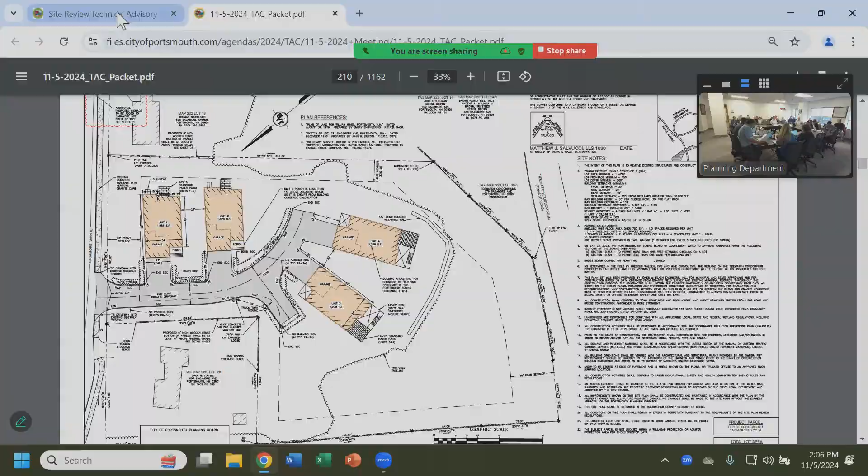If you have that, that would be great. I just have one copy of the previous iteration. But we extended the wall along the back side of Unit 4 and then the back of Unit 3 at the suggestion of Dave, and added plantings along the top of that wall. So I think it was just something that Eric wanted you folks to look at, make sure that it met your approval before we moved on.

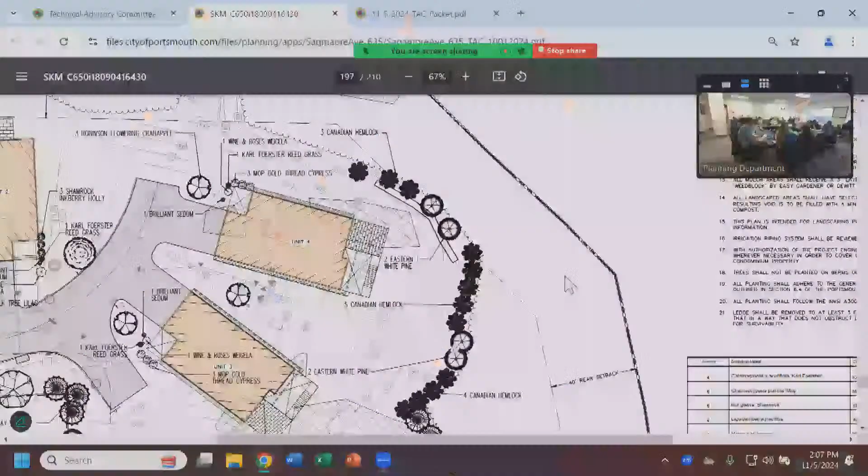All right, this is last month's. Yep, so that's just that one section, and then if you look at this month's plan, that's not the landscaping plan, but it does show the wall, and then the landscaping plan will show that L2 sheet, I believe, will show that plantings along the top of that wall. So I think that works to address the concern.

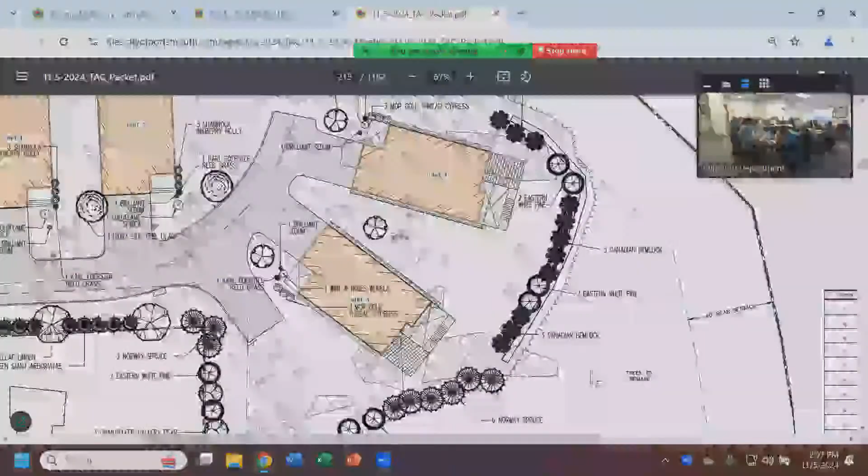And then the only other concern, I think, that was brought up by both staff and by Eric were these sand absorption areas. Joe Coronati couldn't be here today, but walked me through what those areas are intended for and the maintenance of them. They're primarily, and we can add some additional notes that may satisfy DPW if that's where the concern came from, but it's really just...

...monthly and perhaps more seasonally to have the landscaping company that would be hired to maintain the grounds, take a look for trapped leaves and things of that nature that might block the flow of the water. The O&M manual does suggest that if there's any ponding discovered, the association would contact a professional engineer to evaluate the situation and provide remedies if the blockage wasn't obvious. So we think we've addressed all the concerns of the committee and of Mr. Weinreb, and happy to answer any questions.

All right, any questions? So, the sand — you're expecting the people in a 4-unit condominium development to monthly inspect their stormwater system?

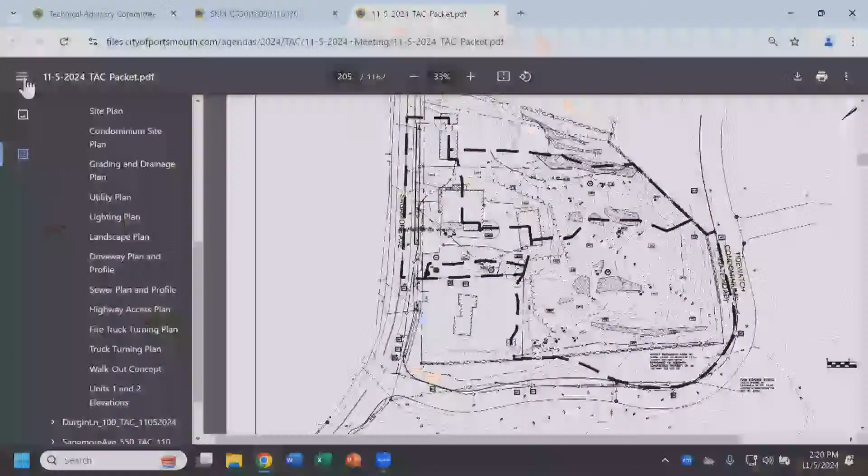Somebody's got to explain it to us, since we're the abutter, what a sub-catchment area or boundary is, because it's on the Tidewatch property. What it implies to me is that we can't catch all the water on the property currently, and it's got to be a good neighbor that takes it on who is already in water distress. We are already in water distress.

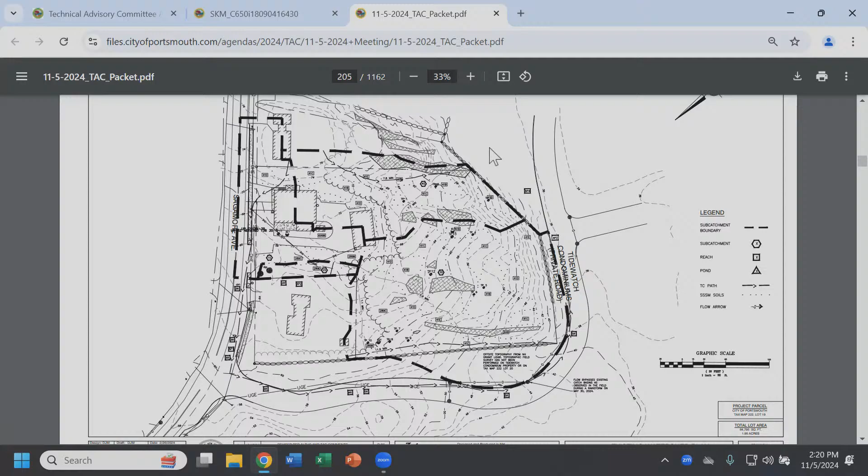W2, please. Is that one W2? Yes. Thank you very much. That retaining pond, does it have a setback requirement? And then while we're on that one, I'll try not to repeat myself, but there's also, you can't see it as well on this one, an overflow or riprap sort of overflow piece just to the bottom right of that. You can see it a lot better in another picture. That looks to me like it's on the property line. Does that have a setback requirement?

Can you go to DM1, please?

I think it's just a couple down from where you are. Very good. If you look at that tree line, that doesn't look like it moved to me.

And that still seems excessive, because TAC brought up the fact that removing those trees and anything that's catching any of that water would clearly create a problem downstream, as they say, and guess who's downstream? That would be Tidewatch.

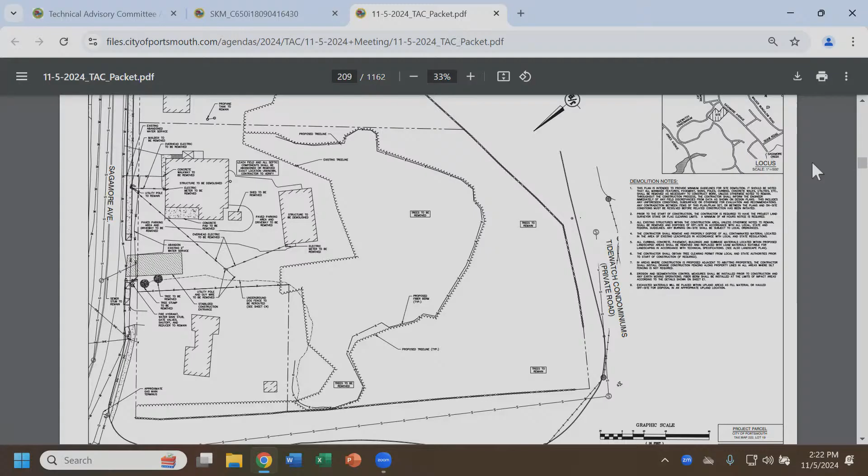C2, please. That boulder wall now, my eyes are not that good, but I think it's up to about 145 feet long. And you can see the Tidewatch Road behind that. I'd be hard-pressed to understand that you can't see that in the woods or whatever trees are left there, etcetera. I submitted to planning some pictures that would give you that indication. But that boulder wall, I haven't seen a boulder wall that's really that attractive.

My guess is it's going to be used from stuff that's blasted from that hill. And that boulder wall is going to clearly be in sight, which again, I think is incongruent with what ZBA stated as one of their approval statements.

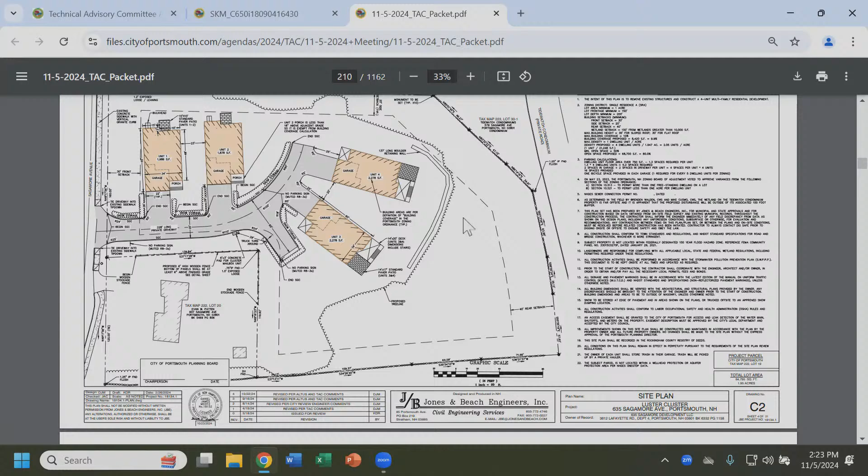All right, for TAC, you can go, you don't have to do it now, but you can go to C3, and you'll see that that riprap outlet is right on the property line. Again, it indicates to me that we can't manage the stormwater on the property, which I think is a requirement of the regulations for the planning committee.

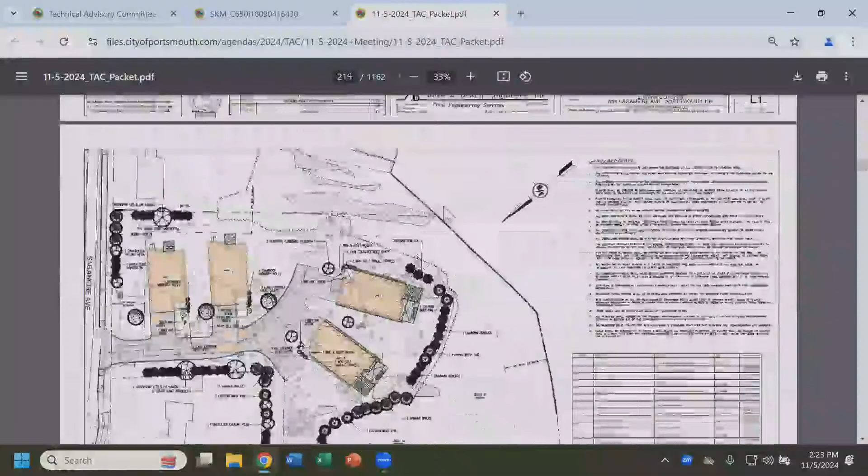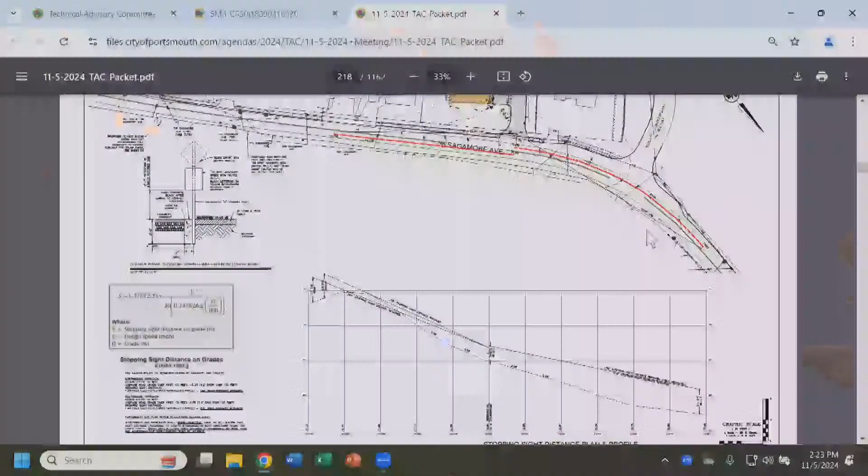H1. H1 is back to this line of sight issue. It's my understanding, and I look for TAC to please confirm this if I'm wrong, and actually, not if I'm wrong, I'd like for TAC to confirm this. It's my understanding that the adequate and regulated line of sight requirement is not met, and that we are potentially going to give a waiver, if you will, for the requirement for line of sight. That to me seems irresponsible, and it seems dangerous.

Just a quick anecdote. Yesterday, driving back to our place on Sagamore Road, just before the Sagamore Court Apartments, somebody was taking a left. Line of sight is calculated from the middle of that access road, from the cluster, again, Luster cluster as they call it, it's the middle of that access road. That person was stopped easily 10 to 15 feet short of that mark, because it's just a natural left-hand turn you're going to take. You're not going to be in the middle of the road and try and take a left-hand turn. So our calculation for line of sight, while it might be regulatory, it's not an effective and practical line of sight. It's a dangerous position we are putting people in. There is no doubt in my mind on that one.

The maintenance of the system already showed - I had that as a note, but I'm not going to bring it up because all of you just brought it up.

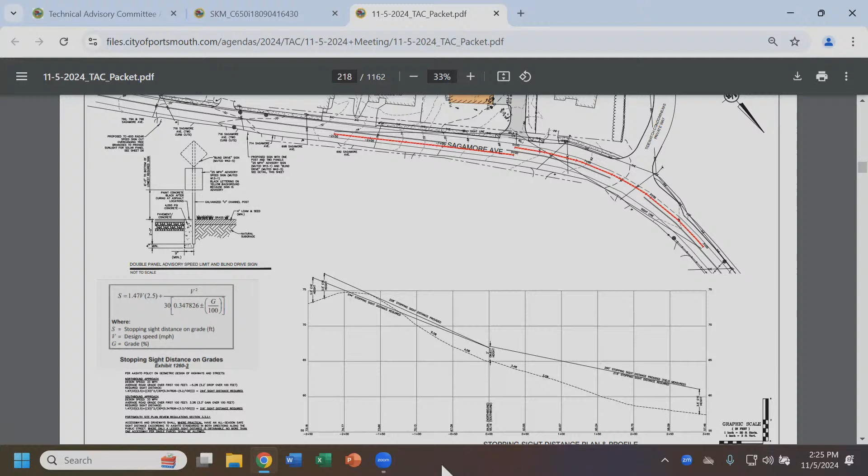Let's see, just a couple other items, sorry. So in the response regarding the elevation of the granite, I don't know exactly what it was, but in items 7 and 8 in the document, it spoke about the elevation of the basement versus, whatever you'd call it, the slant of the hill. I'm curious, did the basement move up or did the hill come down? Because they answered it in a way that just, it didn't seem like anything moved in the answer.

So I'm just, again, above my pay grade, but it's still there. Overcrowding of a granite lot with 4 units will logically cause dangerous conditions for motorists, residents, and pedestrians. I do not suggest that I have even a clear appreciation of how hard it is for TAC and for planning and everybody else to deal with all the requests and objections that applications and rejections that people come to you with.

But I did take the time to go to the site plan review regulations for the city. And if you look at that criteria underneath 2.9, evaluation criteria, there's 19 of them, I think it's 19. And there's several that I just don't believe are met.

Number 3, adequate erosion control and stormwater management practices and other mitigative measures, if needed, to prevent adverse effects on downstream water quality and flooding of the property or that of another. Even with all of the engineering, I just don't see it.

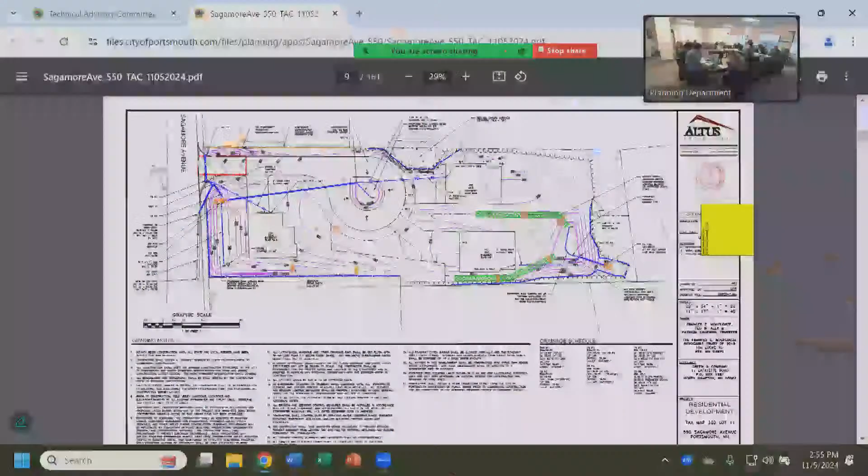We were before you on October 1st for TAC, and we came back following that meeting and made some minor revisions to the site design. In summary, we relocated the rear stormwater management area. If you go to C3, we moved it 20 feet toward Sagamore so that we have a 35-foot vegetated buffer to the property line, with the exception of the outlet pipe.

We raised the finished floor of each building and determined the basement elevations of each building so that we could demonstrate and provide gravity perimeter drains for each of the 3 units. The house on Lot 3, the front lot, we slid back and reconfigured slightly, which allowed us to raise grade a little bit by moving it back, since the roadway grade is a little higher there. We made that a gravity perimeter drain into the closed drainage system near the driveway or the roadway.

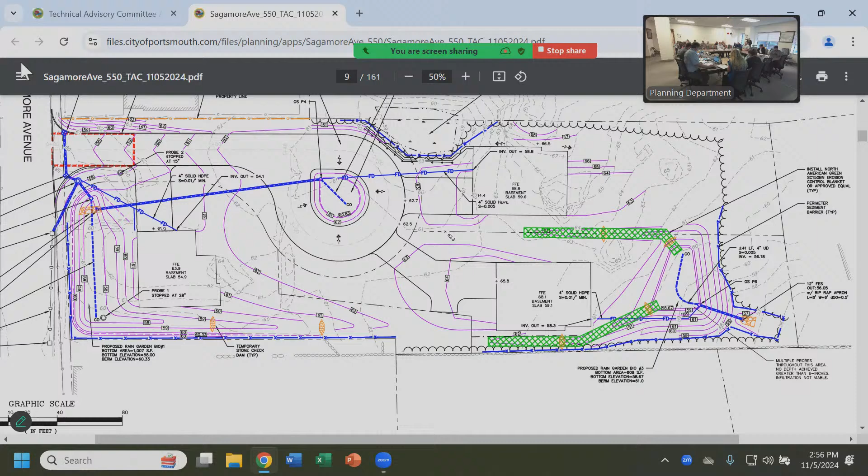On the subdivision plan, which goes up a couple sheets, we added the utility and grading easement onto the plan, so you have in that crosshatch area the utility easement areas in addition to the subdivision.

Lot 4, which is the private right-of-way, is actually now identified as Lot 4. We initially had come in as a 3-lot subdivision with a private roadway, and it didn't click with me that it was actually a 4-lot subdivision.

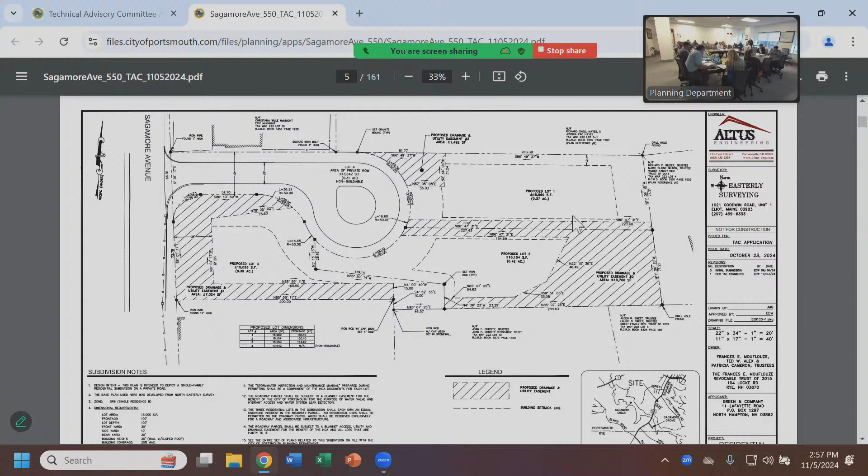On the landscape plan, we've added plantings at the bottom of the retaining wall, around the isolated wetland, and done some additional buffer plantings on the site. Also in the package is a representative building plan and elevation, and those are the revisions we've made as part of the submission package.

I have comments - I believe there were 5 comments in Stephanie's email from the other day. Is there an agreement for the maintenance of the right-of-way?

That will be part of the homeowners association documents. It will be part of the legal review as we get to that final stage. We would hope that it would be a condition of both TAC and planning board.

Please demonstrate compliance with the site plan regulations for section 623 - a whole bunch of items. So the landscape architect has made some minor changes to the plan. They have a letter issued to us yesterday, and I don't want to hand it out because I know that's not what you guys want to see, but there are just minor changes and clarifications to make sure we are fully compliant with the landscape requirements.

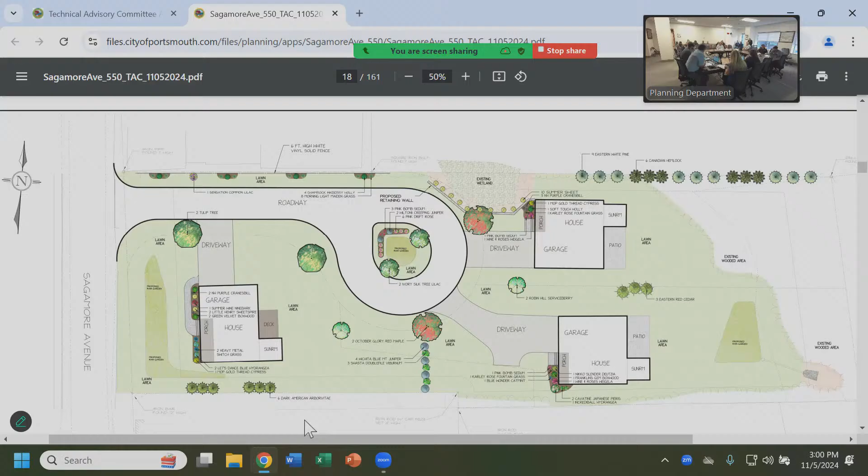So that's really it. I believe the comments and concerns were quite minor, and if you have any questions of me, I'm happy to answer them. Thank you - any questions of TAC?

This plan shows that the stone wall is not disturbed along the property line. In places I believe it is, but... is it the stone wall directly adjacent to the house you're talking about? Let's go to the existing conditions sheet. That next sheet, yep, and that one is upside down. So that wall is further back, not up near the front. The stone wall is all on your property near the front until we get into the woodland, into the forest. So is that pin in the rock wall then? Yeah, but that's 200 feet away from Sagamore Avenue. We're just talking about the actual lot line, because my lot line runs all the way back along that stone. We're not touching anything on the lot line, we're not touching the wall.

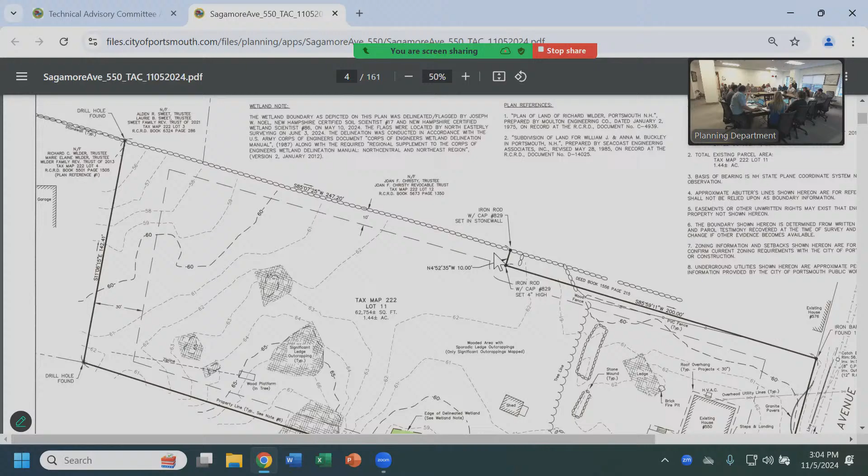Are you aware of where those pine trees are? If you'd like to make comments, we just need you on the microphone, and we really can't have a discussion. No, that's fine, you guys can have a discussion after. You know, I'll ask him after. Okay, that's fine, thanks.

If you will go to C5 on the drawings, I think that's the one I was looking at. Yeah, and so if you look at the lower right-hand part of the drawing, I think that's the area of concern. That's where I think there has been some engineering or planning taking place. I believe that's called a rain garden that's being proposed there, which will help accumulated water. And then it looks like it drains off to some sort of area that has riprap in it. I don't quite understand technically exactly what it drains into.

I don't know if it's a dry well or something, but I think my next-door neighbors and I are very concerned that in the case of an extensive rainstorm like we had back here in January, that's just not going to be adequate to handle the water flow. And that water flow is going to come downstream because that's how water works. Water and gravity together produce a perfect storm, as they say.

And so I do not at this time feel that I have enough actual information to say that these plans are technically adequate to show us that we are going to have no large increase in our stormwater. And I would like to know if there's some sort of mitigation plan beyond what has been shown on that drawing that goes forward to help me understand this.

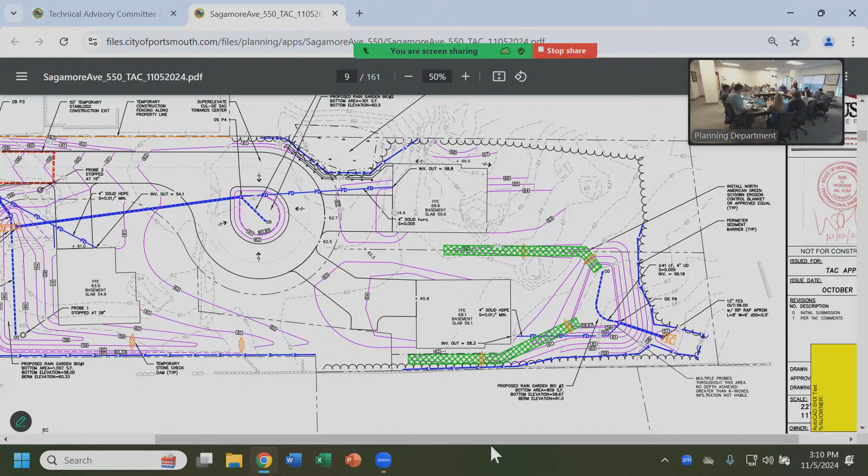I do feel that the Technical Advisory Committee, the TAC, as you call it, excuse me, needs to take another look at this and make sure that the abutters, including Alden, my next-door neighbor, and Rick, my other neighbor, who abut on the other sides, are protected from what could possibly happen. Thank you for your time.

Any other public comment at this time?

My name is Alden Sweet. I live at 72 Walker-Bungalow Road next to Dick. My main concern about this is exactly what Dick and Rick Hayes and a lot of other people have commented about: it's all ledge on the back of that property.

We're downhill from that. And I also have a thumb drive that I was hoping to be able to have you guys view of the water runoff right now. There's a natural sinkhole on the property that abuts mine on Sagamore Avenue. And just in a normal rainstorm, the water collects in that sinkhole because it's all ledge, nowhere for it to go, and especially in the winter when it's frozen, the ground's frozen. And the water runs down my property, onto Sagamore, down the street, and onto Dick's property.

And those two storms we had last January, it was probably 12 feet wide at the narrowest. Once it gets out into the street, it was halfway across Walker-Bungalow. Coupled with the fact that it's all ledge on the back half of that property, they're talking about clearing the trees, which is only going to make the water migration worse, not better.

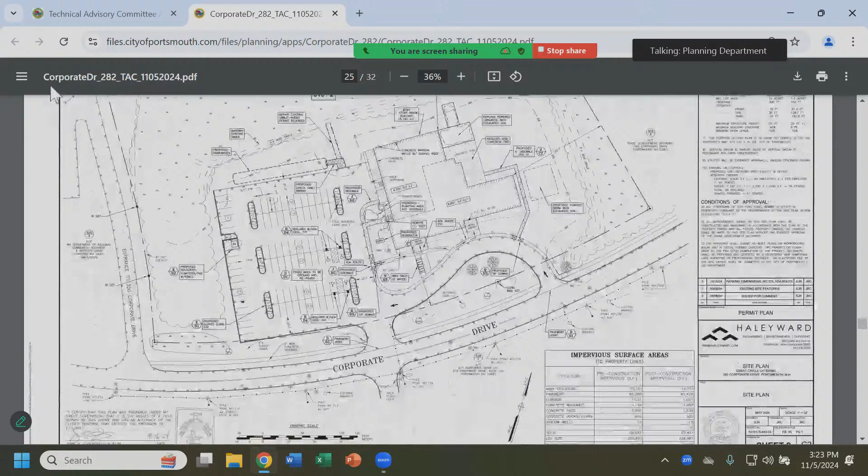Part of the project is to go into that existing swale and clean out the additional siltation that has occurred. That will be shown on further plans. This involves work in the buffer, so there's an application to the Pease Development Authority for a conditional use permit for work in the buffer.

There are no big changes to utilities, although we'll be adding a generator to the site. Water and sewer will stay in the same locations and sizes, but we'll add a grease trap. The Officers Club did have a small grease trap - we're going to add a right-sized, currently sized grease interceptor to the new sewer connection for that catering use.

The dumpster is going to be upgraded. Currently there's a dumpster on a pad that's in the wetland buffer - we're going to take out the pad and put a new dumpster pad with corral on the west end of the parking lot, upgraded with a board fence instead of chain link.

There are also some other removals in the buffer. There's a concrete pad that comes off the north side of the building, and we're going to remove a large portion of that, some of which is in the 25-foot buffer. Then we're going to introduce a sidewalk on the east side of the building for pedestrian access to the rear, to provide secondary life safety access and egress.

The plan that shows the grading and drainage - the buffer impact plan - shows the new grades in the parking lot and the grading of the swale. This plan shows the impact areas: the green buffer area, and the purple, which is the reconstructed swale and the cleaning of the swale in the back.

That swale runs from the northwest side of the parking lot around, heading east along and parallel to the back of the parking lot and the building, then turns and goes southeast and ends up at a culvert under Corporate Drive.

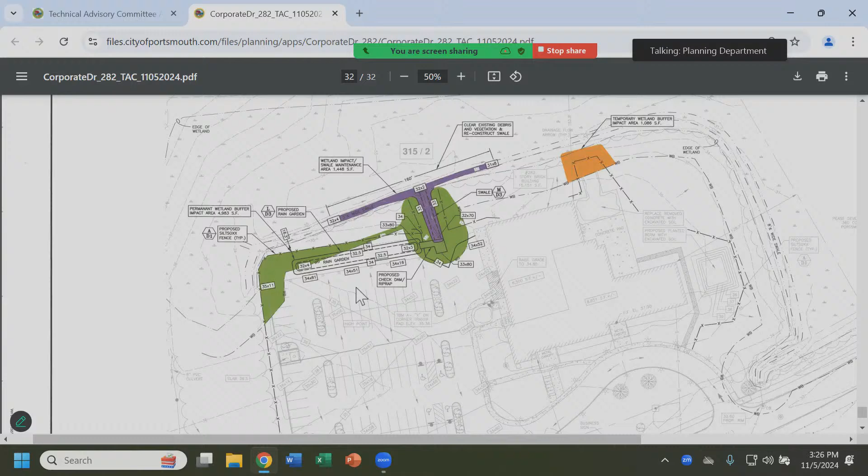The project received a couple of comments from members, and I did submit a response online. The first comment was that the parking lot aprons were recently reconstructed to match the new roadway grades, and if the aprons are disturbed as currently indicated on the plans, they are to be reinstalled largely as they currently exist.

I'm imagining that relates to the two tip downs at the west entrance drive. That's the area where we're showing some regrading. We took into account the new grades. There's a new catch basin that just got constructed to the east of that entrance drive, and I used that proposed construction catch basin grade.

I put a note on the plan about the recently constructed parking lot aprons, as mentioned in the memo, and noted that I put that on this revised plan, so the applicant is willing to have that as a condition. When we get into construction, if there needs to be an adjustment, we'll adjust either the driveway grade or reconstruct the tip down to keep it ADA compliant.

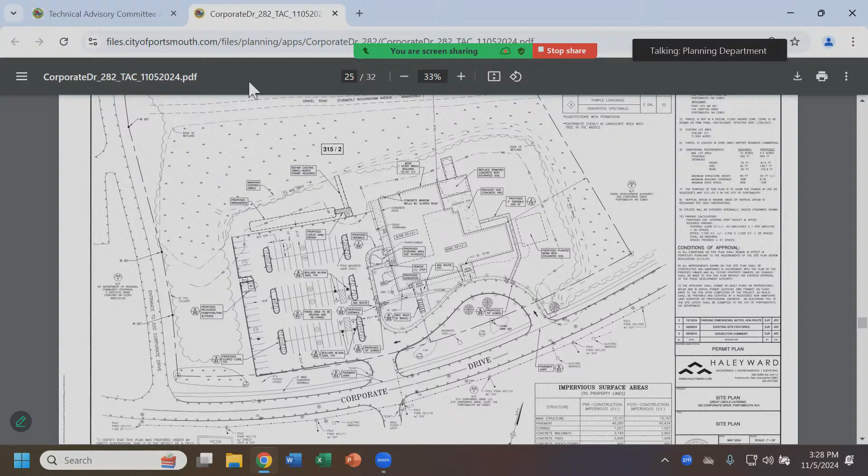We can also go check the grade. I believe that's getting close to being installed, if it hasn't already. I know the street's been lowered, and we can work with the Department of Public Works.

The second comment was to provide no parking signs at the head of each of the ADA parking space aisles, and we put a note on C2 and an updated detail R on sheet D4. There are two dual handicap parking areas on the site, and the aisles are such that we can put a bollard sign that faces two ways, delineating it's an aisle with no parking. It does not impede the ADA access travels to the building.

If there's any questions or comments, we'd be glad to answer them. Any comments, questions for the applicant?

Probably something I should have mentioned in these comments is the requirement of coordinating with our grease trap compliance person, William Burnham, and maintaining the required maintenance logs.

There's a walkway that goes to a doorway. I don't know if that walkway exists, but we're raising the grade, changing the grade, and redoing the walkway. Then we're adding another walkway section that goes around, and we're planting the area in between—that's where the landscaping is going to go. The landscape schedule notes those would be distributed evenly in the landscape area with the tree in the middle. Just in that area? Yep, okay.

How are the landscape plants in the islands? Those are existing trees, and they'll still be maintained. They're going to be maintained? Yep, along with all the lighting—there's no changes to lighting proposed.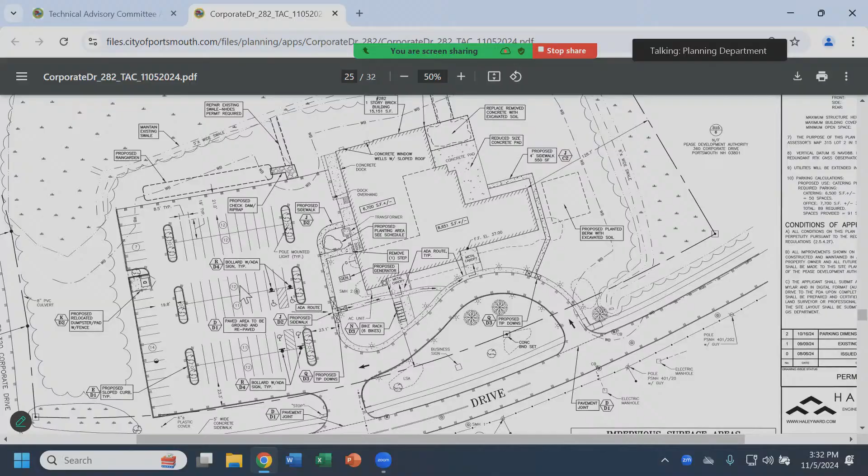John, has your office checked the ADA route for full compliance with the ADA since retrofitting the building? Did you check the rise, run, cross slope of the sidewalks, everything, to make sure everything's in full compliance with the current ADA rules?

Did we? Yes. I believe that the raising of the sidewalk and the grading works to 2% as a maximum slope.

The parking spaces exist where they are now, so you do have to cross the travel lane. I don't know what we can do about that, but they are the closest to the ADA doors, so I think that probably is okay. But you need to just confirm that the entire path is no more than 2%.

And I think, looking at it, we have to offset the no parking signs so that they can get from one side to the other. No, there's only 2 there, never mind, sorry.

All right, I'm going to open up for any public comment on this application. Seeing no one come up or raise their hand on Zoom, close that portion.

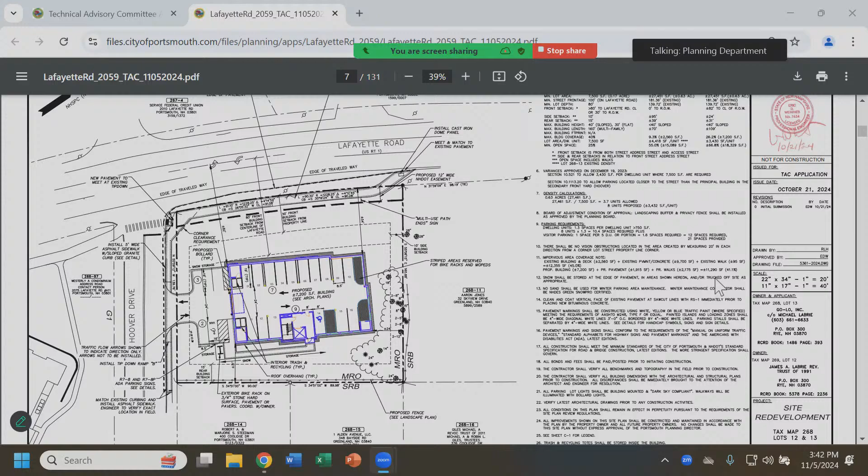We're proposing new utility services, water, sewer, and drainage connecting to the existing services in Hoover Drive. The gas will hopefully connect into the existing service from Lafayette Road. We're in the process of coordinating with Unitil to see if that size is adequate, so we don't have to go into the street. The new electrical services will come off the utility pole in the northwest corner of the site, just off the plan.

Stormwater management - if you go to that grading plan, just up a little bit. Right now, runoff sheds across Lafayette Road. It's a super-elevated road, so all the runoff from the street is shedding across the site, across our existing parking lot, into the northern and eastern part of the site.

There's actually erosion and riprap stone trying to stabilize that site, and most of the runoff ends up flowing to the eastern corner of the parcel, and eventually goes across the abutting property and then into the Hoover Drive drainage system through Coolidge Drive. So when we analyzed the runoff, one of our primary goals was obviously providing treatment, but also mitigating the runoff that is causing issues on the abutting property.

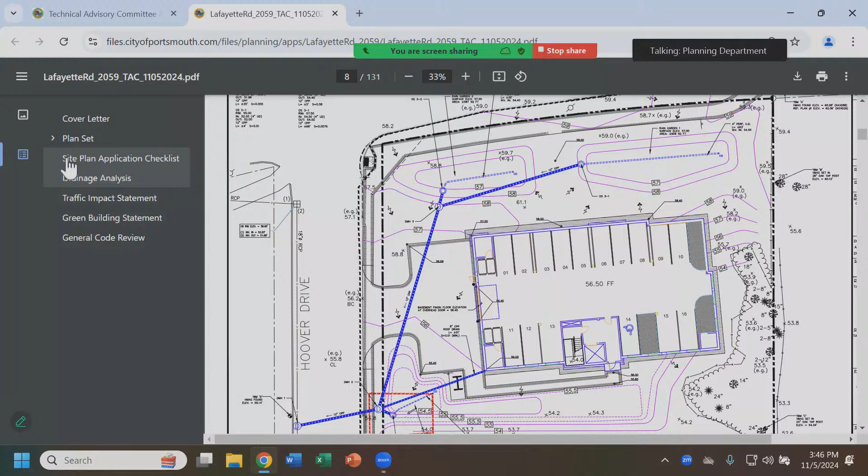Robbie Woodburn prepared the landscape plan, and she can add the existing landscaping plant stock that will be removed to the landscape plan. However, all of that is shown on our site preparation plan, so we certainly can add both back so that you can see it there.

There is no permanent irrigation on this property. Mike doesn't want to, and Pete doesn't want to have irrigation. It's not environmentally sensitive, so we'll have some sort of temporary watering to get the plants established, whether it's just hoses or whatever, but the intent is temporary water for 2 seasons to get it established. That's also identified on note 20 of the landscape plan.

Regarding the sidewalk along Hoover Drive, we have no issue widening it to 5.5 feet along our street frontage. I'm not sure why there'd be a requirement to extend it down to Coolidge, or why we'd need to change material to concrete. The rest of that development is asphalt, with sloped granite curbs. If we changed to a concrete sidewalk, we'd need to change the curb to vertical granite curb, since you can't have concrete sidewalk against sloped granite curb. So our request is to stop the sidewalk replacement just beyond our limits of work, widen it to 5.5 feet, and keep it asphalt.

As noted earlier, we have no issue changing the drain manhole on Hoover Drive to a catch basin.

We already have note 27 on the utility plan that the MEP shall size the fire suppression and domestic water services. We'll get to that should we get through planning board approval, since we don't want to spend money on the MEP until we know we have our approvals in hand.

We'd like an explanation on, and we're willing to work with you on, the need for access to the utility room, whether it's a separate door, and if this is any different than any other building in the city.

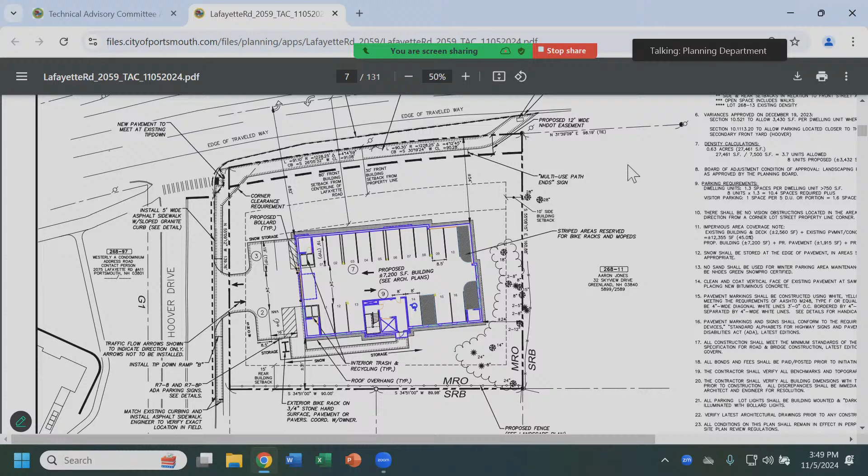I didn't make that comment. For water metering, it's no different from anything else we do in the city. So it doesn't need to be outside? No, you just need to be able to get to the meter systems. So it'd just be an agreement? It's just a key. Do you want a separate door to the utility room? Keys are down in the Public Works Department. We'll give you whatever you need on that. Thanks.

We can add a no parking sign to the striped island adjacent to the van accessible parking space to further denote that it's not intended to be parked on.

We're going to change the tactile warning strips up by where the multi-use path ends to the full width, and we'll widen that out to 10 feet as required. I did go back and check the DOT, and it is in there - I missed it.

If the wave bike rack is not acceptable, we can change to a detail that's acceptable. I had a note that the owner can substitute a bike rack of their choice. I personally like the wave, but we can do whatever suits you.

Mark, do you want to talk about item 2? Sure. That's Eric, sorry.

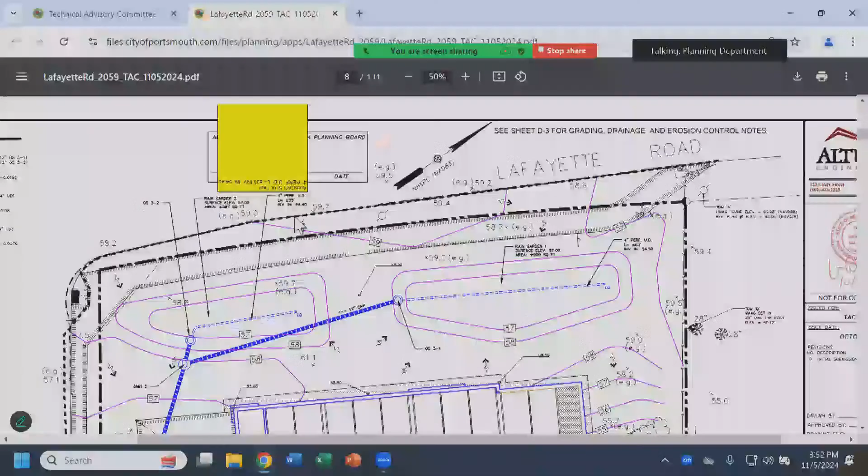It'll probably be centered in the middle and then reduced on the sides. I still have to get the grading on both ends to bring everything to the center, but what it may end up being - it's not very deep now, but it'll probably be a little shallower.

This is up to you guys, but you might want to beef up the plantings in the front there for more screening on the road. I see you have it pretty heavy on the corner on Robbie's plans, but maybe you have more opportunity to put more in the middle now that you're not doing a pathway there, just to give more buffering since it's a busy road.

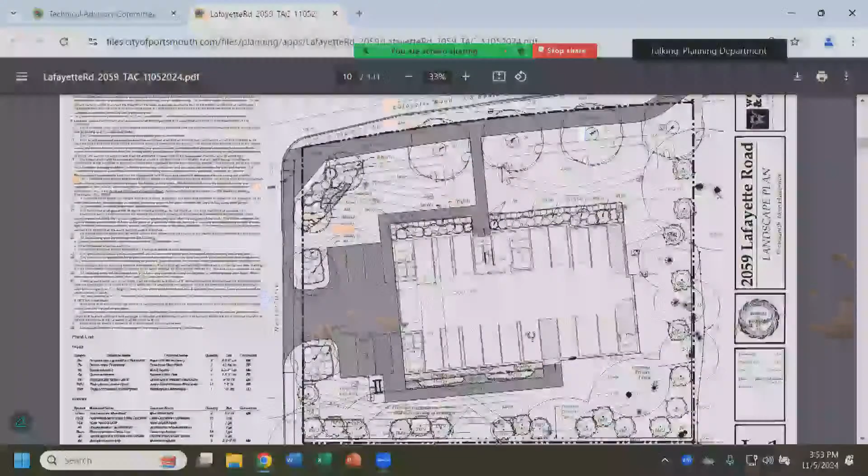Trees are nice, but you might want some shrubs too. You can see there where we didn't have time to go back, so that's how it was - you can see why it's like that. Yeah, we can consider that.

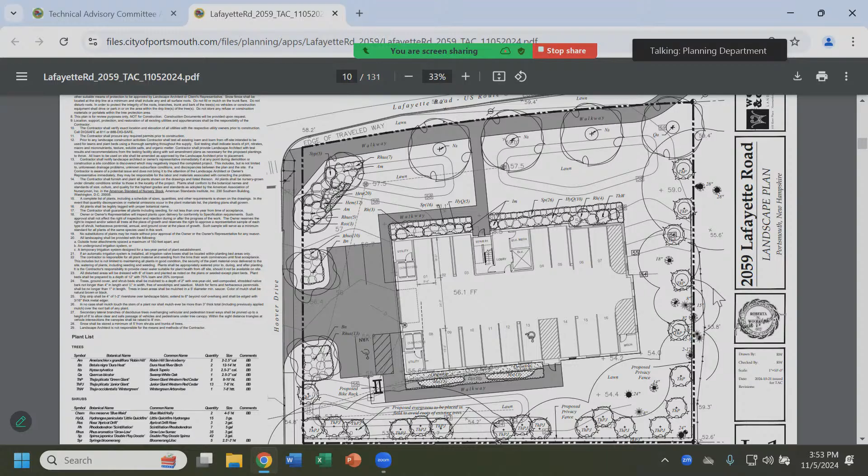So for the CUP, you'll need a parking demand analysis. Yes, so just note that for next time. And so just how everything lines up, we're in December, right? If you were to vote in the affirmative today - if we were to vote today - yes, but we have to have our discussion. If we approve it today, TAC still needs to review the parking demand analysis for the CUP.

All right, I'll open up for any public comment.

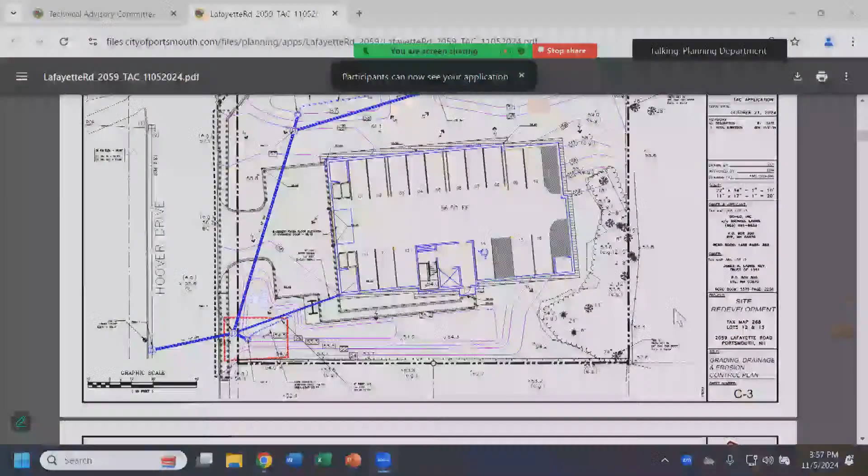Looks like it's just on the east side of the property, probably. Do you have fencing called out? Not quite, I was looking at the landscape plan, that's the problem. You can see the oaks that we are preserving on that whole side. Is that fencing, that next line? No, that's the new tree line, so those are the trees that will remain.

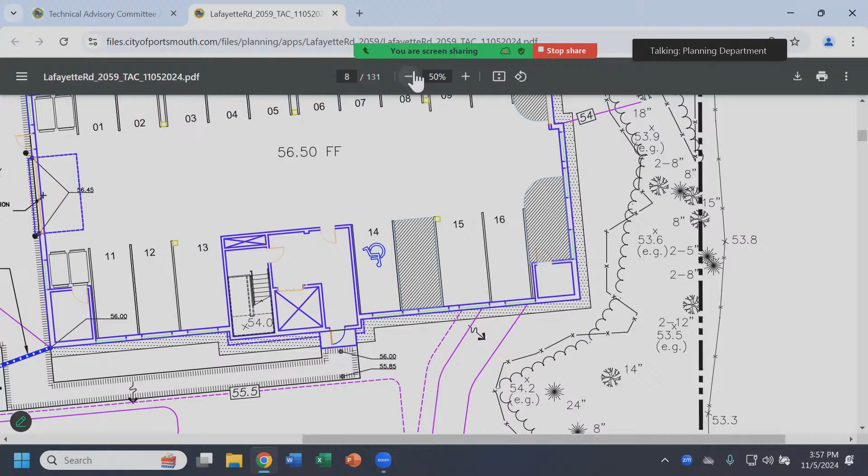So I'm just asking that the contractors stay out of there. We'll protect them during construction, as best we can. Does that need to be certified before construction? Before site work begins, yeah. No chainsaws.

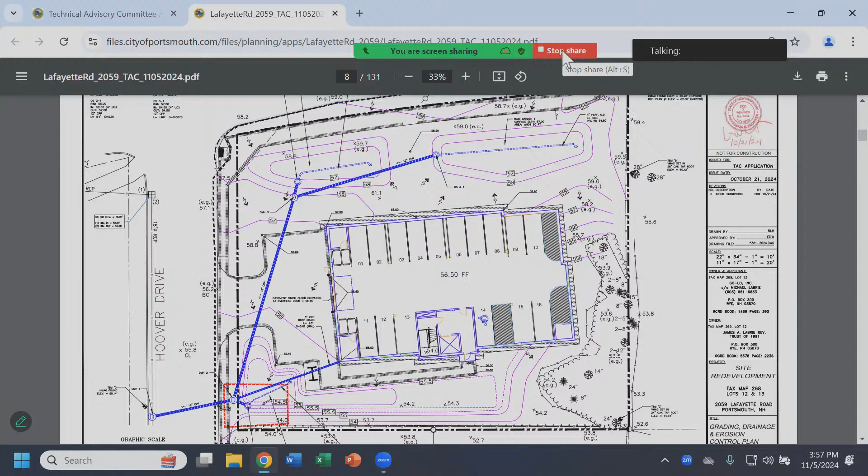We can concede on the concrete sidewalk and remain asphalt, but it has to go to Coolidge. It does need to extend to Coolidge. So to summarize: we'll concede on concrete sidewalk, remain asphalt, but it will need to extend to Coolidge.

And the second point that I completely missed, I admit. You're rerouting some drainage, and that's laudable, and I understand why you're doing it, and I think it's the right thing to do. But two questions: did you check the capacity of the storm drainage pipe to make sure there's room for the additional cubic foot of flow you're sending in that direction? The Hoover pipe? I have not done an analysis of that culvert.

Second thing, according to our GIS, the drainage pipe takes a 90-degree corner at Coolidge Drive, which may be an issue with adding flow to it. There's literally a 90-degree bend, a dogleg. I want to look at that and see if that's appropriate. Down by Coolidge there are actually a couple of 90-degree corners. So I just want to make sure that's not a hydraulic issue. We'll look at that.

We're also proposing treatment for that area through a small rain garden at the corner of the transfer facility turn and right near the fuel station. And again, that will also still drain down to the gravel wetlands behind the site.

The maintenance addition near Peverly Hill Road is approximately 6,650 square feet in size, a single story. It's being constructed within the existing paved parking area, so there's absolutely no increase in impervious surface for that building. We'll be providing, as you can see in the site plan, full access around the building, providing another security gate at the corner of the building.

The site will have a Knox box on that. The existing police storage area there will be relocated to the back part of the site near the salt shed and cell tower area.

The previous plan shown here had a generator and transformer located on the east side of the new addition. Recently, going through the design build phase, it was determined that there's actually adequate power to the site currently. They just need some new panels, so the generator and transformer are going to be removed from the plan. We do not need to provide new electrical service.

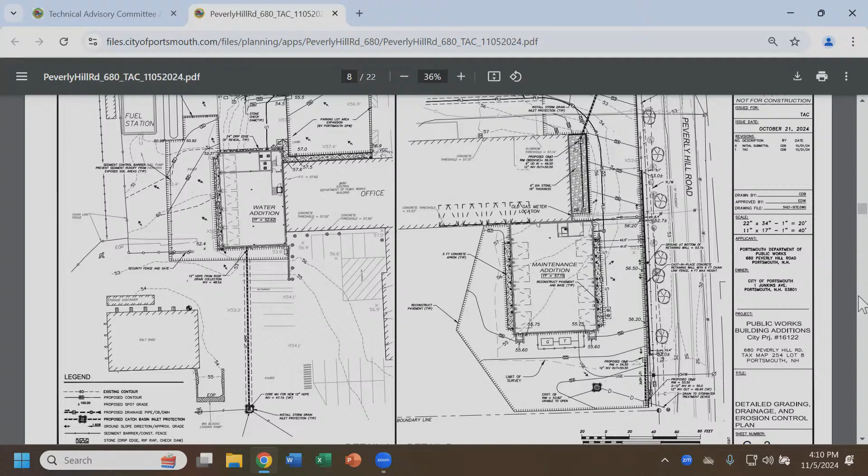Some minor changes happened since the last plan: the building was narrowed down very slightly. We dropped it about 3 feet in width and extended the edge of pavement on the Peverly Hill side out slightly, just to create a little more access for vehicles turning around the building. But really, since the last work session, there's very minor changes to the site plan.

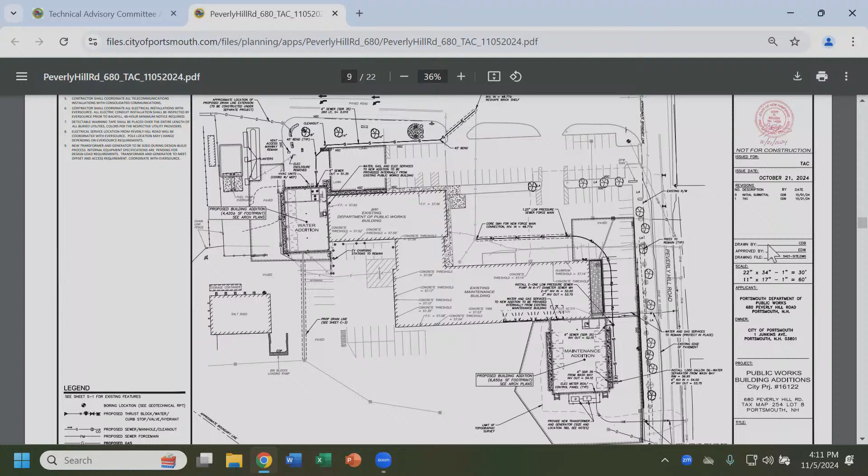It's been a long day, so I'll stop my presentation there and see if we have any comments. All right, any questions, comments?

I didn't have a chance to look it up, but just make sure that for the second floor, the single exit travel distances don't exceed whatever the limit is. I just noticed that, I'm not saying it's a problem, I just don't want it to be a problem.

I just had a question. You did the turning radius for the fire truck. Do you need the semi to go through there, or does it work? We didn't need the semi-trailer to go through the building, behind the building where you have the fire truck. Or does it work? Am I just not reading it right? If the fire truck can make it, a tractor trailer can too - it has a longer articulation, so it turns better.

If you look closely at the turning radius, the bigger challenge is the trucks coming out of the bays. So that's where you were forcing a little bit of relief, that's why you needed the 4 feet. Yeah, if you have very large trucks in the bay and they're coming out, that's the outermost turning radius, correct? And you have the room on your lot to go out? Absolutely, that's how we get deliveries.

Will you go out the whole way or just a little area? It's just that little area where you see a retaining wall - we were just pushing out just that portion. Just the retaining wall area? Yep, correct, because there's slope there. Got it.

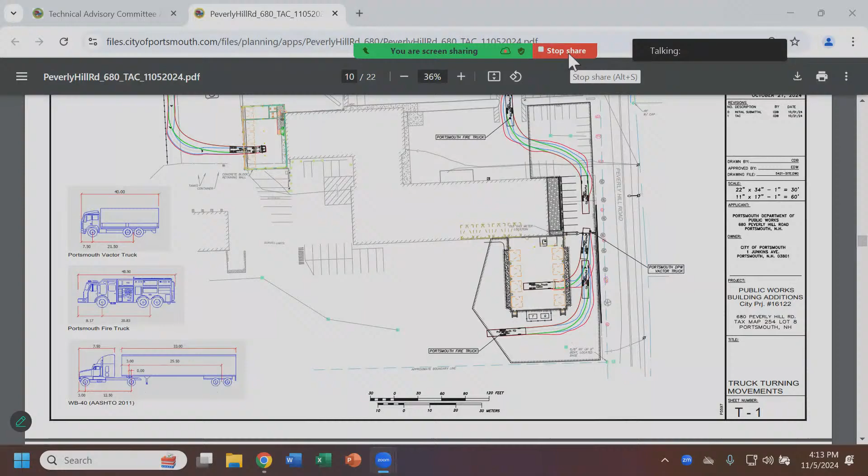Looks good to me, if you guys are happy with it. Yeah, I mean, we're fine. I know there was a lack of comments, but that's because we've been working with the engineer doing the iterative process on the drainage. Yeah, a lot of this stuff we've seen five times already.

I would just add, I wasn't here for the initial presentation and haven't had a chance to look at this, but this is technical advisory committee - when you guys apply for the building permit, we'd want to flag fire inspection issues if something jumped out, so you can tweak it before you submit. That being said, I'll look at these closer between now and whenever you apply for the building permit.

But I did have one question, kind of jumping around here - the gender-neutral toilet that's being proposed, it's a multi-stall configuration, but the idea is that it's multi-gender, so male or female or whatever you happen to be at that point in time, as you walk in, you're in the same area with multiple genders. Is that right?

Yeah, correct. So the stalls are walls rather than partitions - floor to ceiling walls with doors. Oh, so like cabinets. Correct, so the toilet facilities are completely enclosed with walls and doors. The shared spaces are for washing hands. So really the only common area would be where you're washing your hands. Correct. All right, understood, thank you.